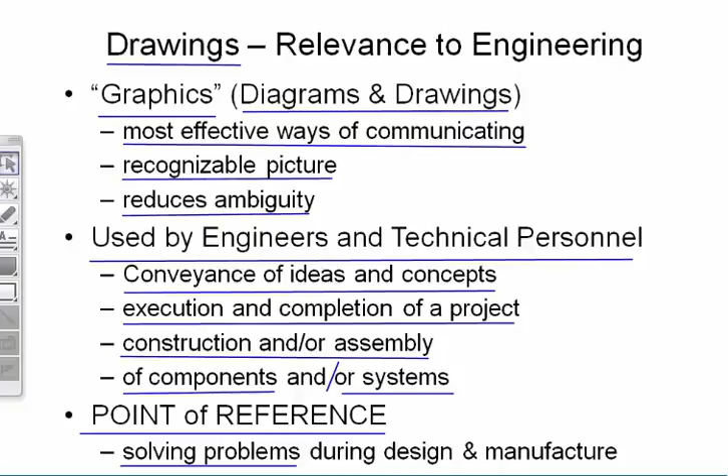And it's certainly a point of reference. Everybody comes back to the drawings and the diagrams to see what's going on because they're used in problem solving, again during design, manufacture, but also during maintenance and inspection functions, which is so vital. So I think that's an important start.

Drawings and indeed diagrams are certainly tools that engineers use, and they're used at various stages of the workings of a system. And I suppose four key stages are the tendering stage, helping in procurement to get an accurate quote, and avoiding future disputes arising out of discrepancies. Principally because if there's no definition there's no information, but if there's a definition of what is required because there's an actual drawing or a diagram representing it, then it's much clearer.

The design and engineering stage is clearly where the development of the drawings takes place. And that expansion keeps going right through to the construction or assembly stage. And then once you have the project, you are of course required to operate the project and maintain the project. So drawings have to bear in mind what information will be necessary at that stage. And so there are definitions there, which I hope will support those main headings.

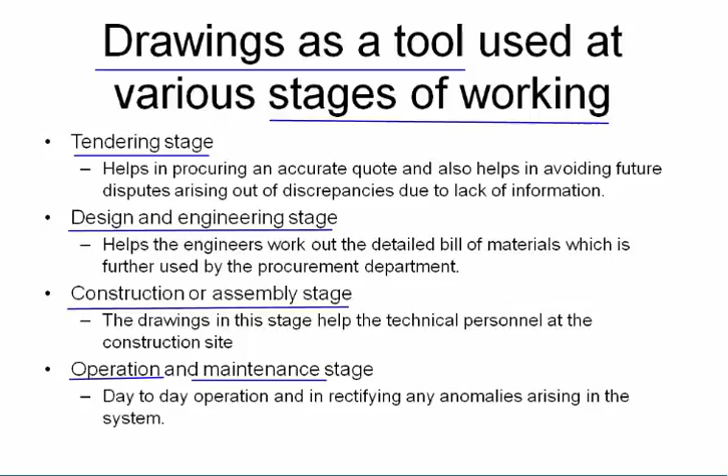Okay, so the idea really is that when an idea is conceived, a drawing is done, and that drawing is developed during manufacturing. It's provided with a finished product through the distribution channels. It goes to customers. Customers then have this habit of wanting changes and improvements, and that leads itself then to the modification of the drawings and the development of more ideas.

And so there is very much a cycle of activity taking place within a manufacturing organization, so things are constantly changing. And one of the most important things in any drawing function is to accommodate and track the changes that will occur.

It's interesting that if you do an audit on a company to see how well organized they are, one of the things you say is, okay, well, look, suppose this component changes. How do you deal with that change through from design and manufacture to distribution, recording, repair of the item? And by looking at how a company is organized, seeing how it manages change is one of the best ways to determine how cohesive the organization operates.

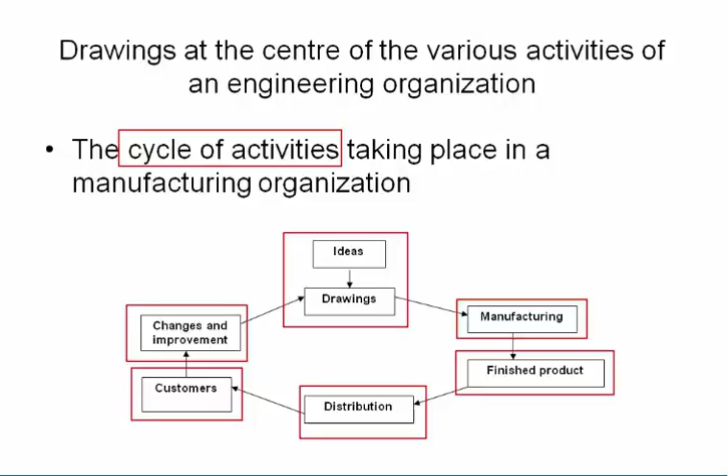And so certainly drawings and diagrams are at the heart of developments and changes. So we have to have good systems in place to make sure they are correct and accurate, properly distributed.

And then we come to standards. Now, there's a lot of confusion about standards in some respects. What is a standard, and why are they necessary? Well, I think you'll agree that what we're defining with a standard is a technical specification. And it's not only for emerging technologies, it's also for well-established technologies. So if something is built to a standard, you know what you're getting.

If that's the case, once you have an established standard, then it should reduce the development time and the cost. It utilizes sound engineering practices that are proven. So as a result, development but also trading costs are decreased because everybody knows what they're buying. You could argue that we are lowering trade barriers by saying here's a product that we offer, which is following a particular standard.

And then there's the benchmarking of product quality, and the definition of safety issues, all of which require documentation and management. And of course there are some economic factors in this, such as the reduction of market risks, because people again know what they're dealing with, and indeed the protection against obsolescence. You've only got to look at the mobile phone industry to see how quickly product life cycles change. About 9 months is the average product life cycle for a mobile phone.

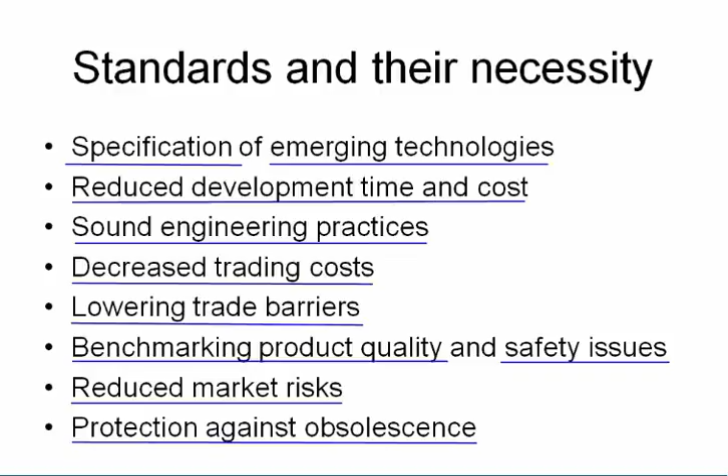So, what sort of drawings are there? Let's concentrate on drawings first of all. Well, principally, if a drawing is representing a particular item, then there are two-dimensional drawings. For example, key plans, plan layouts of buildings, drawings of structural design details, machine parts and fabrication drawings. And then we might need more details, so we have section drawings so that we can slice through a device and look at how it's constructed stage by stage. Clearance drawings to show what the separation is between various parts.

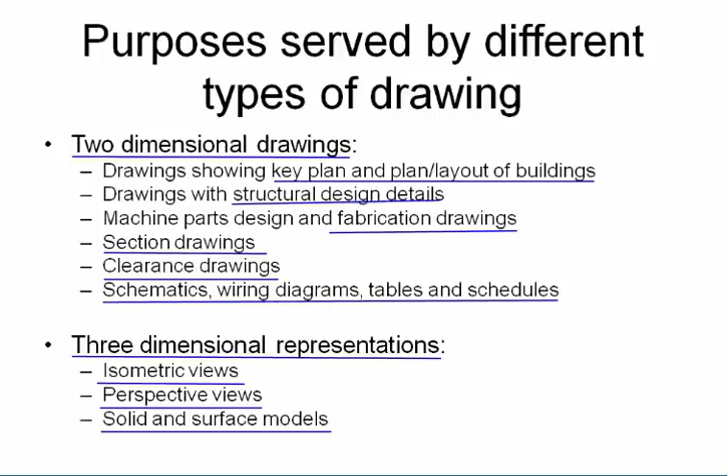And then we come on to schematics or wiring diagrams, tables and schedules, all of which support the construction and maintenance of equipment. Now, sometimes two-dimensional drawings aren't sufficient, and it is better, because of the complexity of a device, to show a three-dimensional representation. We can see that in isometric, in a perspective view, and sometimes we can use solid and surface models, or what they call wireframe models as well, which you can turn and twist to view different angles on, say, a computer-aided design system. So I think that amplifies that section well enough.

So here is a sectional drawing, and you can see here we have a drawing for a piece of equipment, and in this case there is a section drawn on AA, and it is drawn below the device itself. So let me show you the examples of first angle and third angle projection. First angle projection is very often referred to as ISO or English projection, whereas third angle tends to be referred to as US or American projection. But here we have a section, and so which view do you feel this is using? Which projection are we using for this?

Admittedly, this is a section drawing, but we can use the same argument. You'll see how if you look at the way that a solid object here is in the middle, you can then see that if you look at the front and you see projected at the back of the object the view that you see from the front, that's what we call first angle. But in this case, you see the object in the center and the views are at the front. So this view is at the front, so this would be a third angle projection.

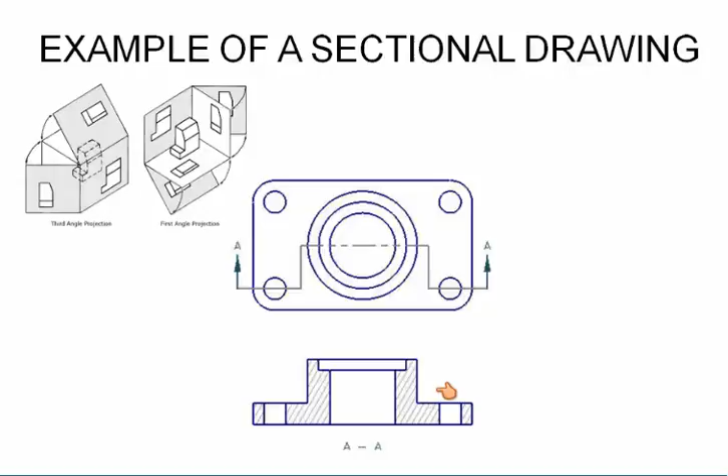Here's a typical isometric view of a machine part. Isometric is drawn, generally speaking, with the angles from the vertical in 30 degrees to the baseline, and there is no perspective in such an issue.

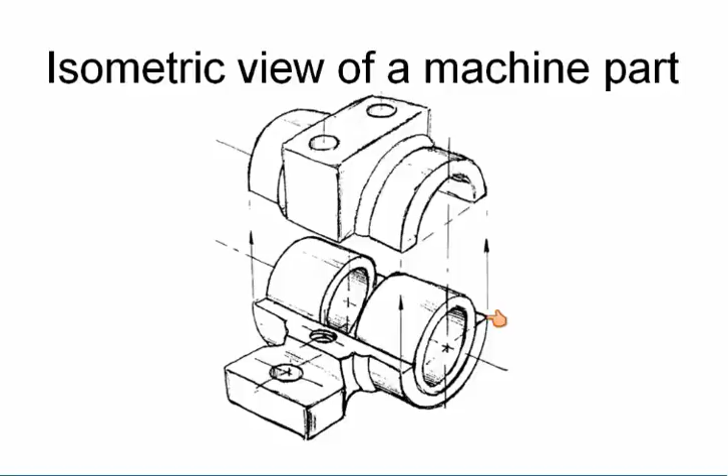Again, that's my view. I don't know if Hugh has a view on that, for example, but I think that's worth stating. Okay, good. No, I think these discussions are really quite important.

So here's an exploded view of a bearing assembly. Again, this makes it much easier to understand how the system is assembled. It doesn't convey to you how big the device is when it's fully assembled, but it will assist somebody to actually perform the assembly. So again, which approach to drawing is best will depend on what stage you're at in the production of an item. And there are many forms of these, I'm sure you appreciate.

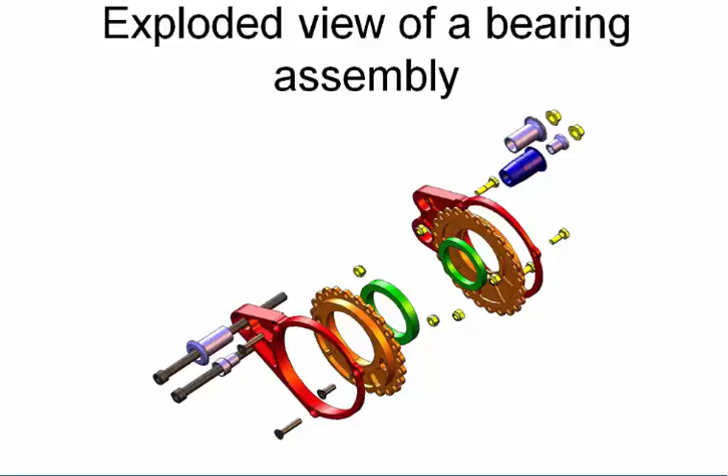So we come to discuss standards in a drawing office. This particular discussion assumes a formal drawing office. So on a large project where you've got a number of design engineers, the design engineers and the drawing office function work very closely together.

And what a drawing office seeks to achieve are, we think, the following issues. First of all, the uniformity of graphic depiction has to be maintained, and this goes back to choosing what angle projection you're going to use. The second thing is then, only necessary information to be displayed on the drawings. There's no point in putting an awful lot of clutter on the drawings that are meaningless.

Next issue is concerned with the dimensioning. Correct dimensions should be done, informative dimensions. And again, a lot of engineers put far more information on than is necessary because they think it's convenient, but actually it's potentially confusing to the reader.

And again, standardized symbols, and I say that because when you provide drawings, you must declare what symbols you're going to use and what they mean. It's no good assuming that people know what the symbols mean. You must make it abundantly clear.

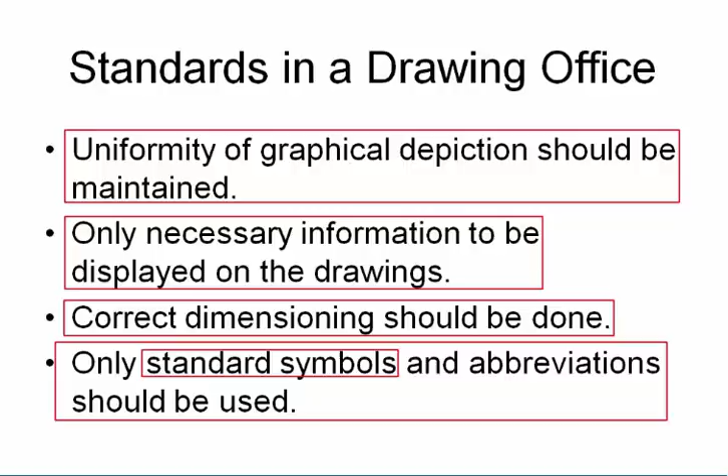And if you're going to use an IEC standard, for example, IEC 617, which are defined within the electrotechnical vocabulary and other documents, then we want to use appropriate abbreviations and appropriate symbols which are familiar to everybody. So you need to declare that in a drawing office for a particular project.

This is where we move to things like computer-aided design systems and computer-aided design system management. And again, there are established ways of using computer-aided design systems, and the main areas are, first of all, drawing control.

Well, all the drawings that are produced are held in a central archive, which is then backed up, and for the purposes of looking at that archive, you need access for viewing so that people can go in, retrieve the drawing that they want, and ensure that they have the most up-to-date drawing.

So, users must have access to a CAD system, and again, during the creation of drawings, these drawings are held in a private area. The point of that is that they cannot be released to the central archive unless they have undergone a process of completion and approval. So again, somebody's got to take responsibility for the issue of the drawings.

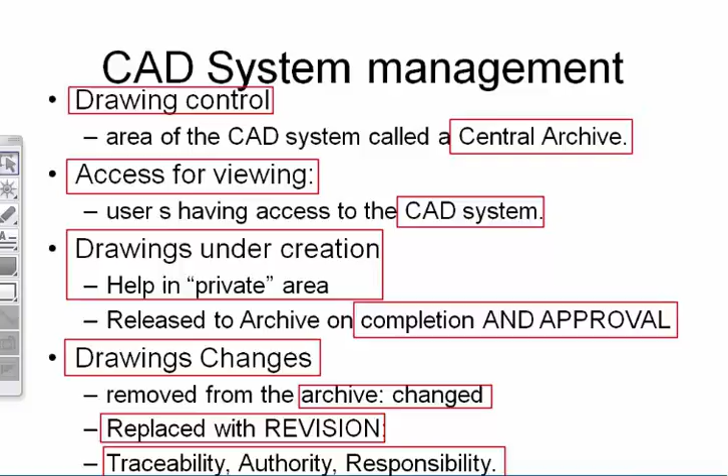So again, there must be a way of removing from an archive, causing a change, replacing with a revision, and then there must be traceability, there must be authority and responsibility in permitting a change to be done. So all of that has got to be managed with a computer-aided design management system.

So we've talked a lot about drawings, but what are they? What are they made up of? Well, the five key issues here is that you want a margin around a drawing. So for example, if I put a border around here, if you were to print this page and some of the edge of the page gets damaged, which is more likely than the center, information is not defaced. So you want border lines which define where the drawing starts.

You need an orientation mark which tells us which way is up or which way is north. You then need a frame grid reference system so that you can find particular parts at certain coordinates. So across the top here you will have A, B, C, and down here you will have 1, 2, 3. And these will mean that if you take a point here, you can refer to that as in area C3 of the drawing by looking at the appropriate cross-references.

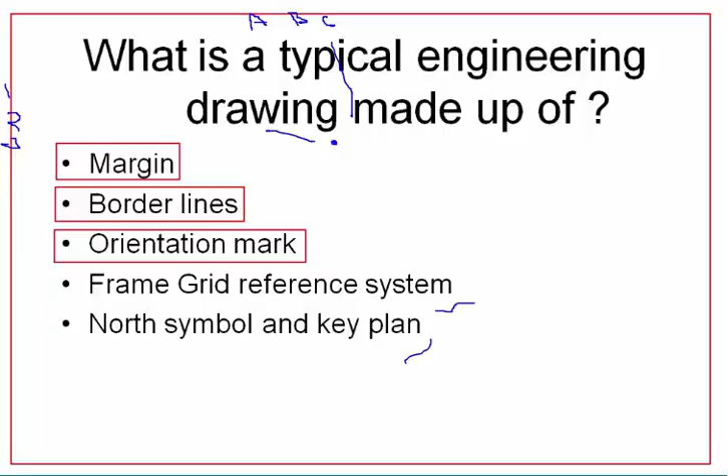And then the north symbol and key plans to explain what the information is. So these two are vital information as well. So here's a sort of typical engineering drawing with the margin, the border, the grid lines, and the frame. The area inside this is called the frame. There's space for notes, and there's space for other information here, which is the reference block, as we've called it.

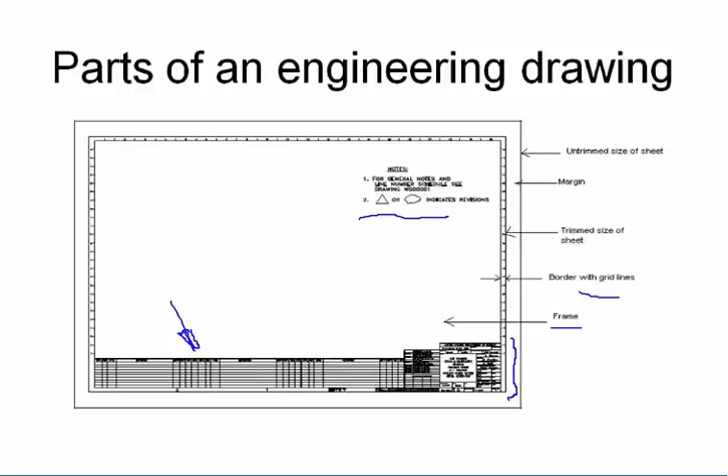And also there is an area here which is suitable for what's called a bill of materials, an inventory, or other listings that provide appropriate information for that drawing. So a form of a drawing could be a number of issues.

For example, a block diagram is just drawn by a series of blocks. If you're describing how a plant works, then you have a series of blocks here, and you say, well, in this case, function A occurs, then the next thing is function B, whatever it is, and function C. So you can describe a process as a series of function block diagrams. It describes just literally functional relationships represented by blocks. With annotations, yes. Showing connections, if they're simple, yes.

So if we're talking about a simple distribution system, a product distribution system, then you say, well, lorries come in here, they deliver the product, it's stored in function B, and then it's retrieved in function C, it's packed and delivered. Now, how much detail you show for that depends on who the drawing is being shown to.

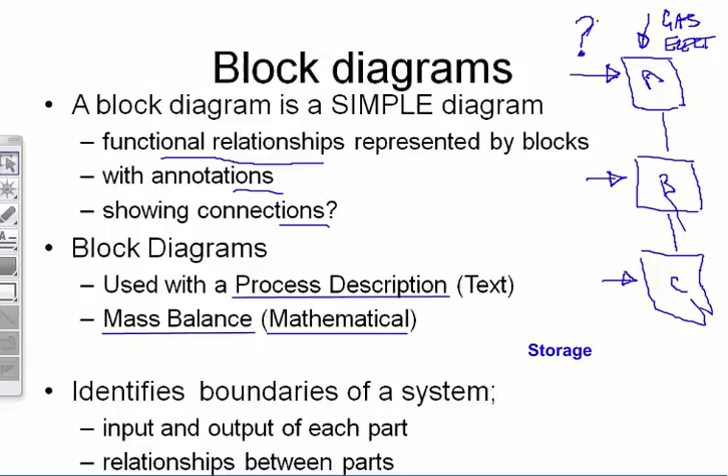Sorry, the points I'm trying to make here, we're thinking about things like storage, capacity, throughput. If I could spell that right, it would be good. All of these issues concerning mathematical values go on a mass balance to be able to show their relationship, if we're in chemical manufacture, for example. So in support: block diagrams, process description and mass balance.

But in creating these block diagrams and text, we begin to define things like the boundaries of a system, what it can and can't do, how much space we need for it. We need to be able to define the inputs and the outputs of each part, and indeed the relationships between each part in general terms.

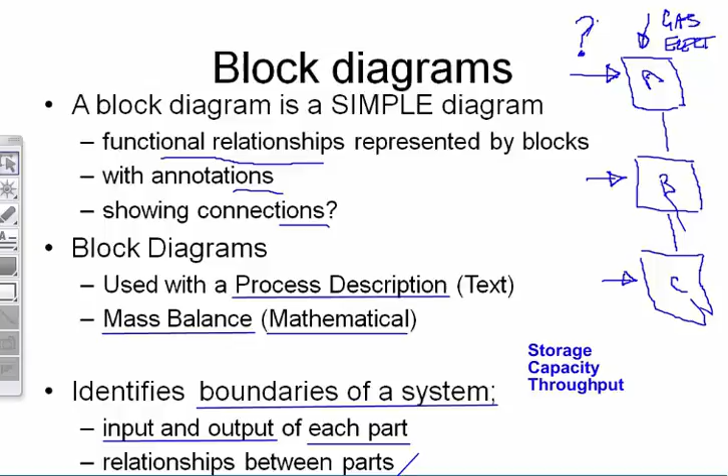For example, if product B is being heat treated, then do we need an area where the heat treated product is allowed to cool before it then goes on to C? So you see, block diagrams can have all sorts of information in them, which we then have to control.